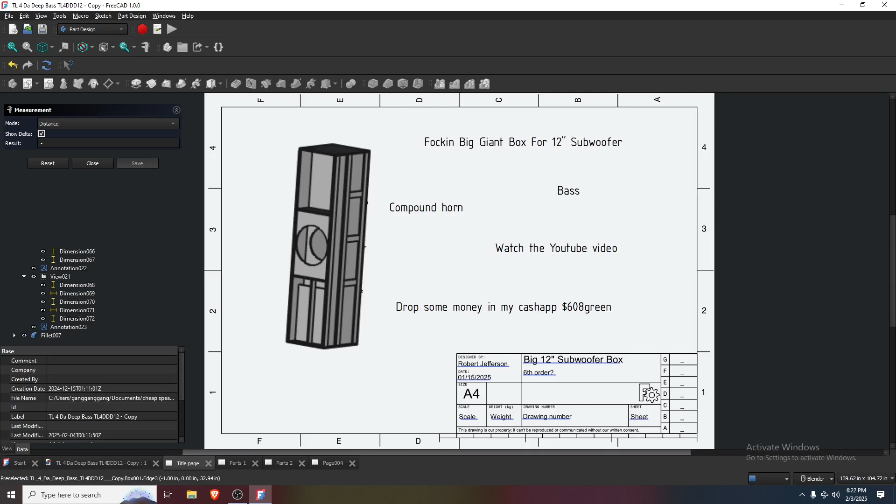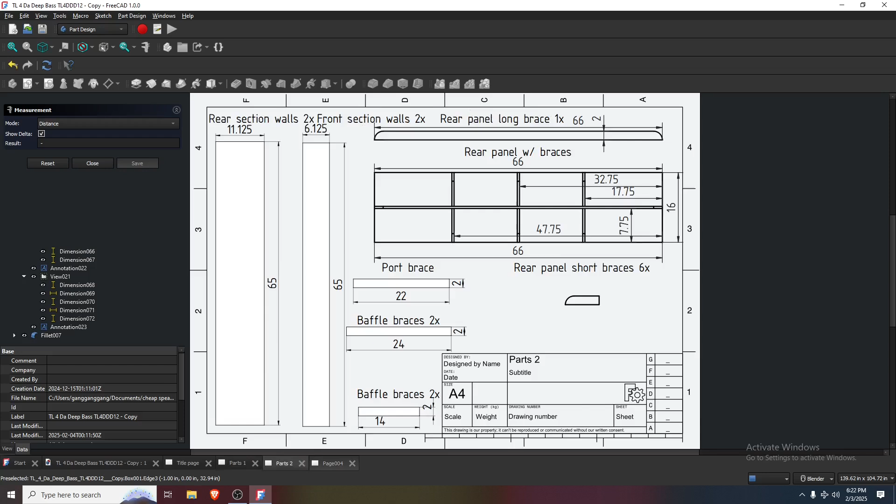Here are the parts. I had this formatted really nice. When I imported it into the new FreeCAD version, it kind of messed everything up, and I'm just gonna leave it. I can't deal with it anymore, man. I can't. Here's the other parts, and here's some diagrams. Hopefully you find this stuff useful.

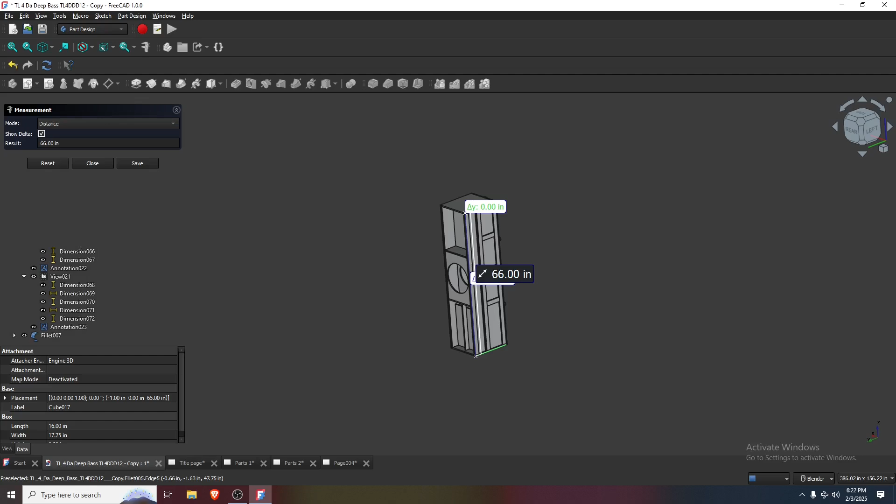Alright. So here's the model. And I'm going to get you some distances here, some dimensions. I was recording this video once, I nearly had a dang stroke. I was getting so mad at this new measuring tool here. I don't know how it works. But it's 66 inches top to bottom. That's pretty big.

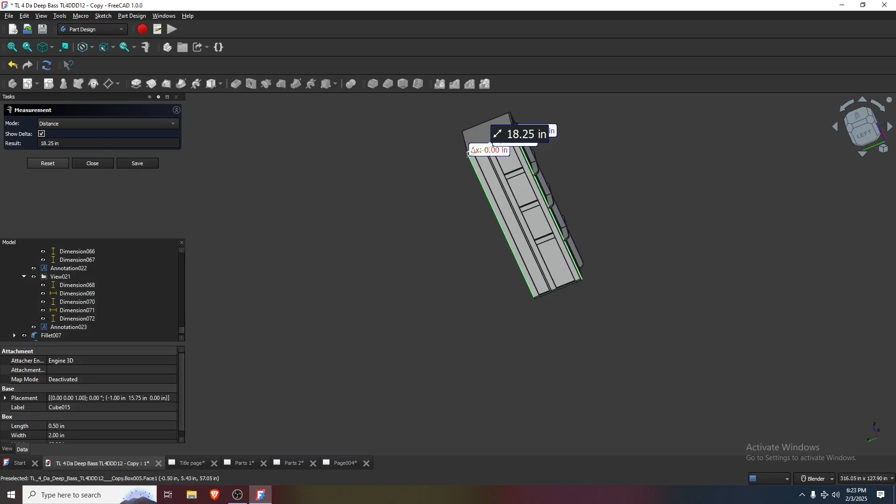So front to back, let's see. Oh, come on now. Alright. 18.25, but these little braces back here are 2 inches thick, so that's 20.25 front to back. Now let's go side to side. Come on now, there we go. 16 inches wide.

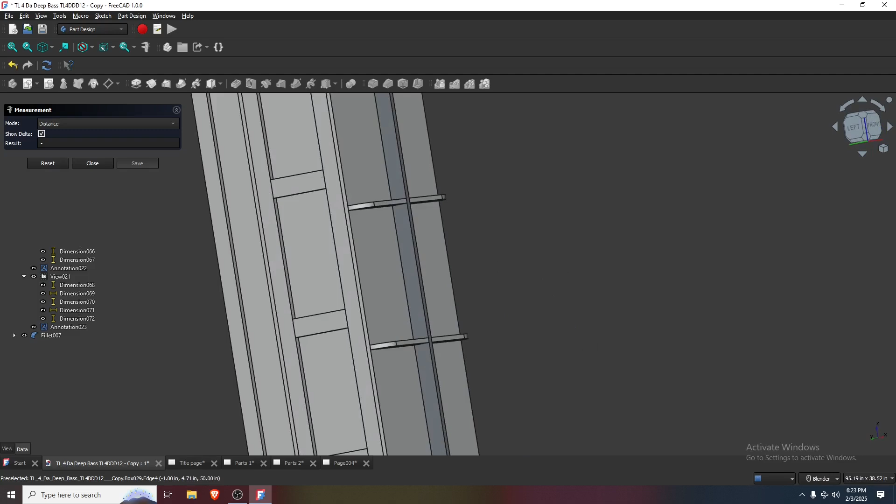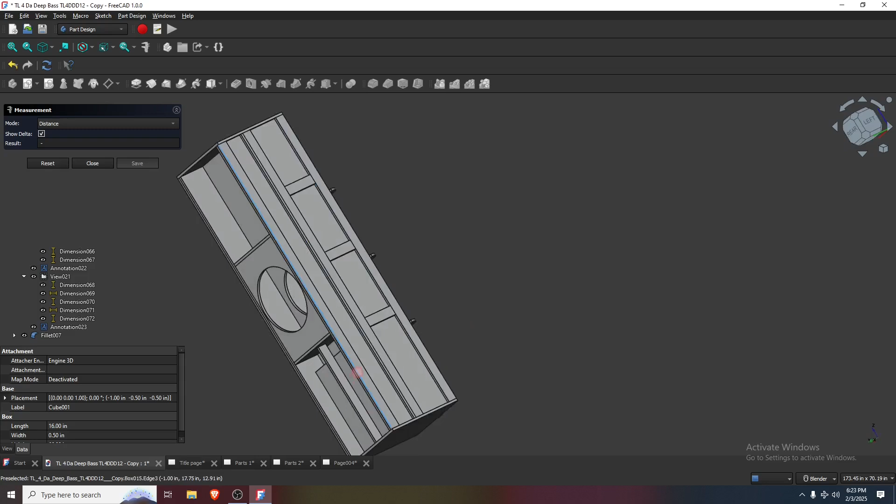So yep, here's what it is. It's a compound horn. I'll take off the back here for you. You can look in the back. The back is just this big offset resonator transmission line thing, but there's a little port down here that lowers the tuning. By length, this whole thing is like 35 or 40 hertz. I forget. I think it's around there. But then this port brings it down to, I think it's 23 hertz. And then since it's offset, it doesn't mess up at 3 times the fundamental. It plays longer than that.

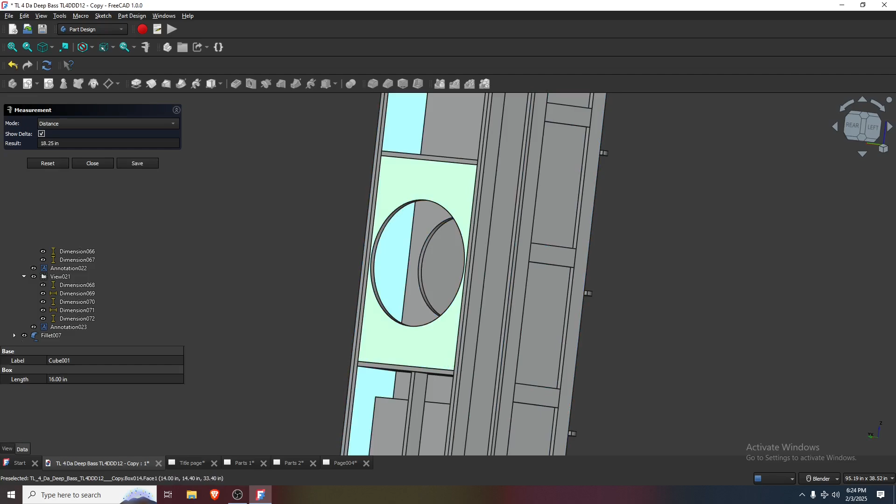And then I added this little thing up here. It's tuned at about 200 hertz to extend the range even further. Now this thing up here, I'm not sure if it'll work best with this panel here, or if it'll work best open like that, or if the panel could have a bigger opening, or some padding inside. I don't really know. The back end could definitely use some polyfill down in this lower section, but you could try it without it. You can make this design so that the back can still come off, or you can just glue it on, because this particular design, you can put the speaker in through the front.

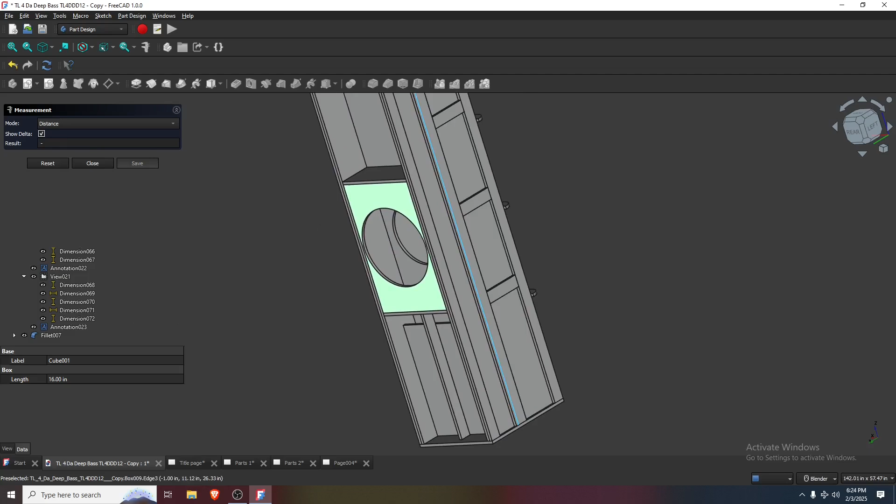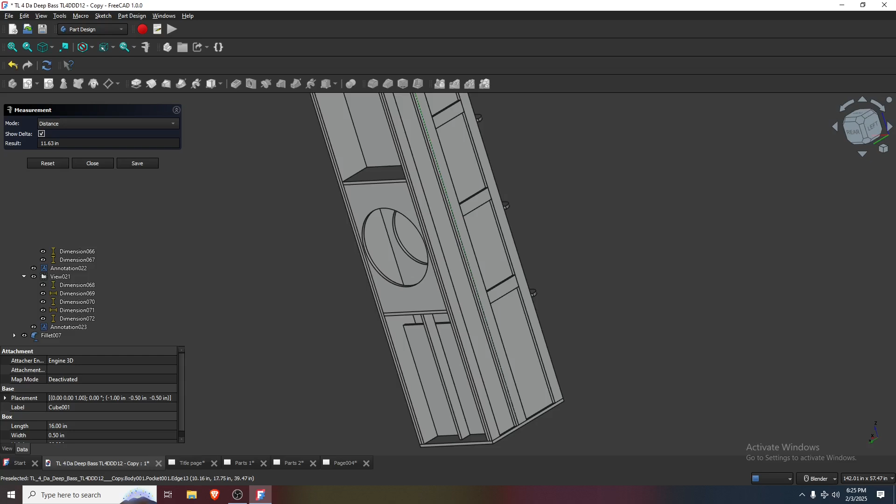Perfect. Okay, so here's the point of the compound horn design. Why we care about 200 hertz is not because we want to play 200 hertz through it really loud, necessarily. It's because you're still going to low pass at 100 hertz or 140 hertz or something like that. And then your phase remains consistent a lot longer. Sorry, I had to cough there. So what that means is that it's easier to integrate into your highs, or your mid highs, or your kick bins, or whatever you got.

All right, so don't know how I just got rid of that panel there. Let's ignore it, and let's get into Hornresp. This new version of FreeCAD's a little different than it used to be. I'm not used to it yet. We use an old version of Hornresp because I'm too lazy to update it, just straight up. All right, so here we go. Right now I have a GRS 12SW4HE, and let's look at what it gives us here.

Acoustical power output. Trust me, this hump down here at the fundamental is not going to be that big. And up here at 200 hertz, yeah, it does hit some wingus pingus. But look at how quick this is falling off. That's going to be beautiful. So diaphragm displacement. This is why I try to tune it by length in this area, because there's a lot of excursion just a little bit above the tuning frequency.

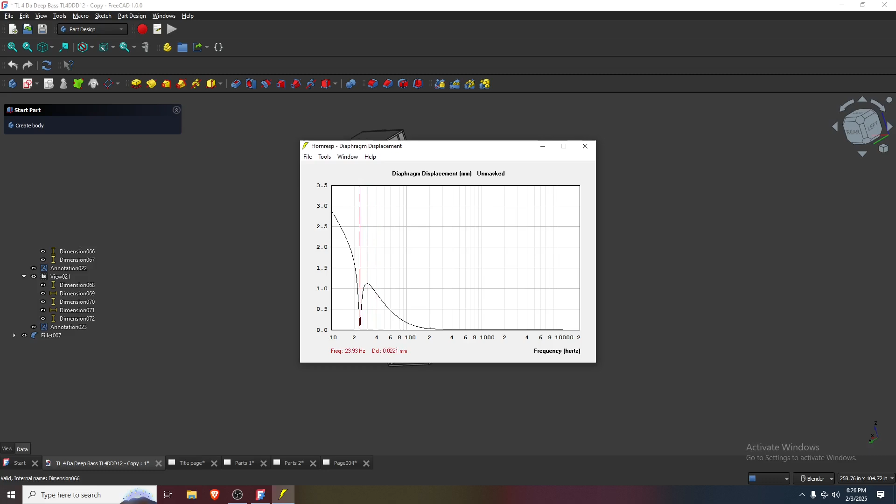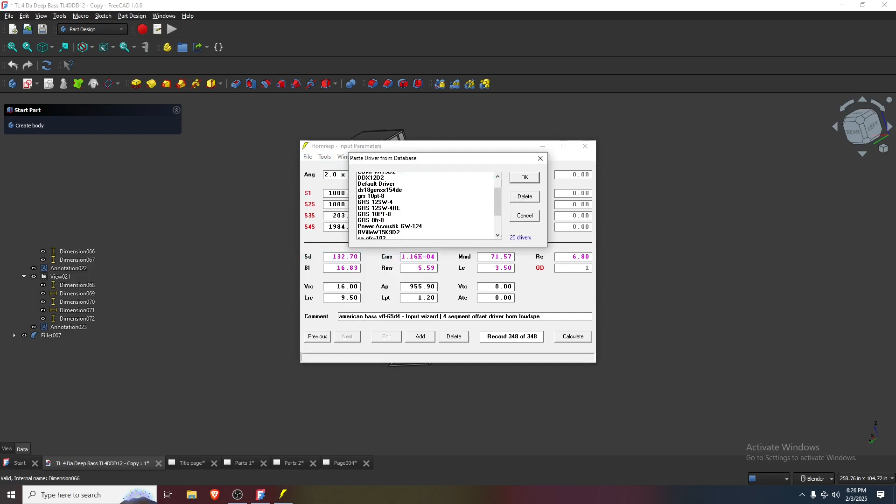Now, it's going to be a problem with some subs. I wouldn't recommend putting in like a Skar DDX12 or some other driver that's got really low Q and high motor force, because you're probably just going to smash backplate at 30 to 40 hertz. So anyway, let's go try a Skar SDR12D2, very average subwoofer, right? Okay, so that also works pretty good in here.

So let's go to Loudspeaker Wizard and let's look at this real quick. In Loudspeaker Wizard, I have added some polyfill and I have lossy LE enabled, and then we get this. Yes, I know at 200 hertz there's some wingus pingus. Sorry about that.

So let's see. Where does it tell us how much polyfill we've got in here? Under power? Where is it? What do I have to go to here? Filling? Will it tell us how much filling I have? I have 0.192 kilograms total. That's not that much. And if you don't want to use filling, that's fine. Probably still sound mostly okay.

So that's 0 polyfill, and we get more fundamental, but we have a little bit more weirdness happening at about 100 hertz, where that cancellation is going on in the rear section, the low section.

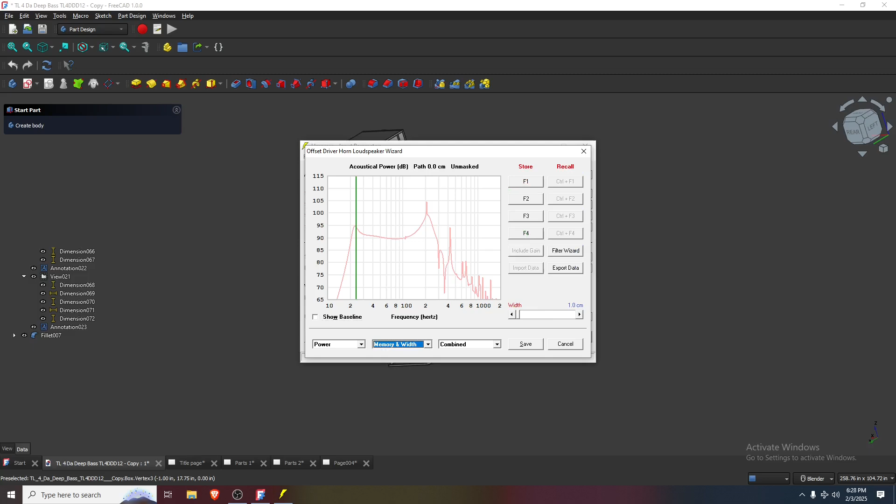All right, so let's look at memory and width here, because this is where we have our filters. Let's go to the filter wizard. Let's turn our filter on, and you know, there's this big wingus pingus up here. But check this out. If you just low pass it at 140 hertz with like a second order filter, then you get that. That's not too bad.

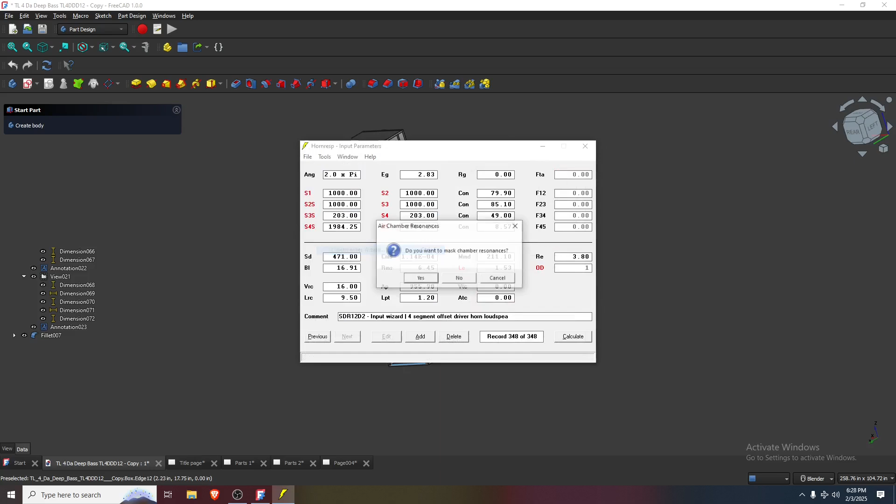And then let's go back to our, let's just capture that or save it or whatever. Oops, went all the way back out. My bad. All right, let's put our filling back in. Filling. There it is. Okay, so we just had, what was it, 47? And then a little bit here as well. About that much. That's about the same, whatever.

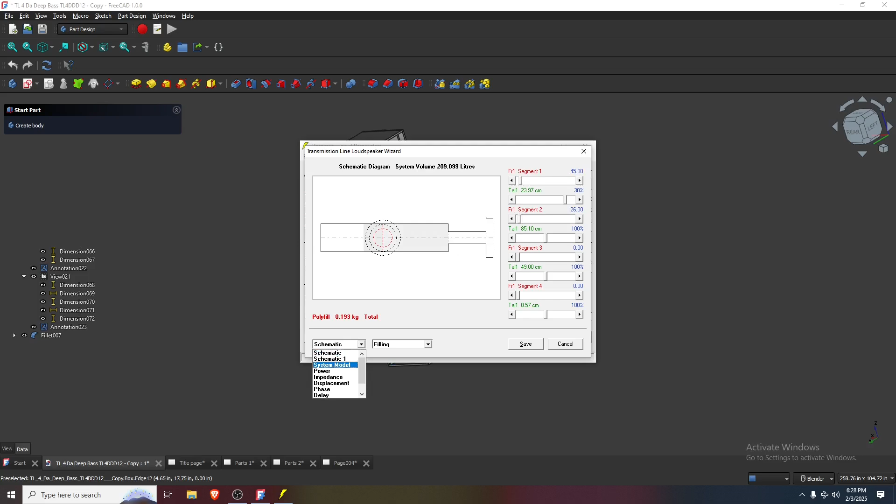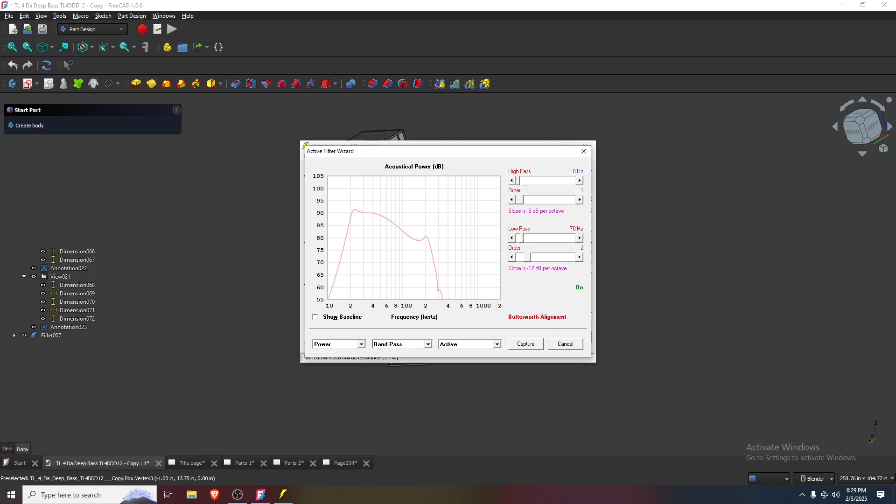But you can low pass it lower, and obviously then you get less and less sound out here towards 200 hertz. But the point of this design is that, look at the phase. The phase doesn't go all crazy at like 70 hertz or something, like a straight resonator would. All right, the phase remains pretty consistent. Obviously, the filter does modify the phase. If we just turn that off, this is our phase without any filters at all. Cool, awesome.

All right, so this is the design. This is it. I don't know if it's 100% good. I just don't know. Sorry, I don't really know. But let's go over to chamber here. I'll show you what happens when we modify the area of the port. So where it should be tuned, it's probably 207 hertz. Okay, but we have that high resonator tuned at 200 hertz, and that's what we're modifying here. So as we make it bigger, we cannot get out to 207 hertz. We can't do it.

And the bigger we go, the more Hornresp doesn't like me anymore, and the program will crash. So let's just give you an example of what that looks like. I'm gonna be pressing this button for quite a long time. So put on some lo-fi beats to relax to while I'm pressing this button, because it might be a while, and the program's definitely gonna crash. But from my memory, it was pretty interesting what happens before the program crashes. I forget what number that is. Maybe I should just click it like this.